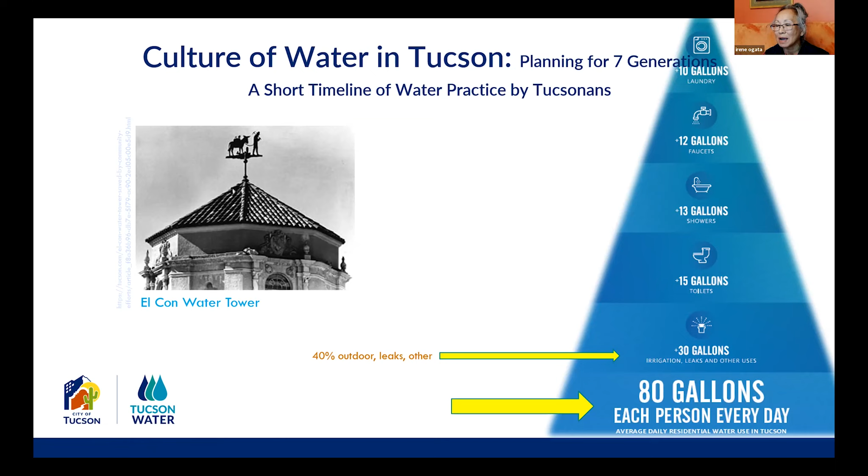In Tucson Water, this is the graphic we're now showing in terms of how we are using water individually. 80 gallons per person per day is the average use, and this shows how that water is being used in the various outlets. But for us here, what we're interested in is that outdoor use—that's where my perspective is from, the landscape architect's viewpoint.

I'm going to start this timeline way back in 1871, when Tucson incorporated, and that was when water was still delivered via barrels by a horse or mule-drawn cart. People were paying 5 cents a bucket as they got their water, and it was still a private enterprise, a private franchise.

In 1882 was the first piped water. The city of Tucson had 25 fire hydrants, and we were paying $216 a month for that usage. The other use the city had for it was to sprinkle Main Street.

Because of the pipes and having to pipe it from wells, there was a demand management problem—we didn't have enough pipes, we didn't have enough pumps. So the city was already concerned with demand management on how to get all that water to the people whose pipes it was getting to. They were already starting to limit irrigation at nighttime, and the water supply to parks was shut off.

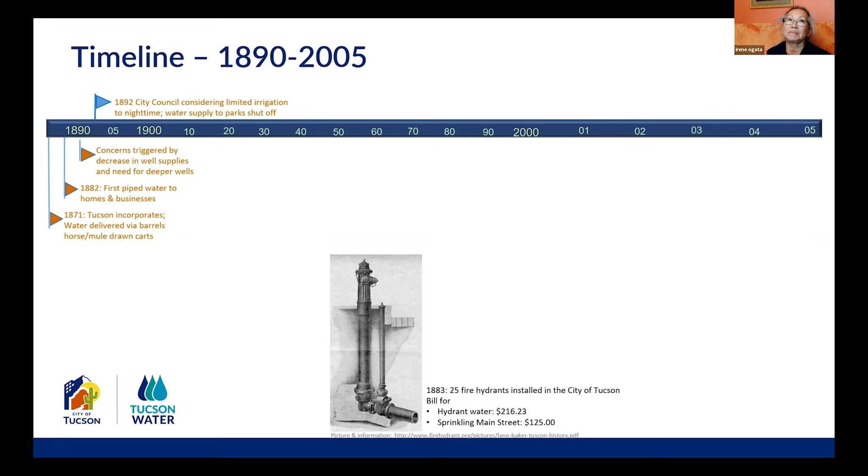In 1900, Tucson bought the water company, so now it becomes a public utility. And I'm putting down 1904, the state of Arizona's proclamation for Arbor Day, because this is really important for the city of Tucson. The ethic back then was to convert a desert city into a garden city.

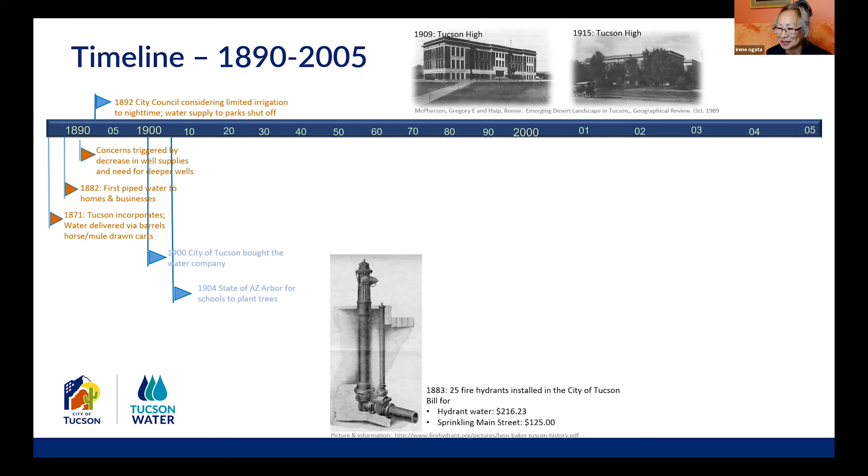The city civic leaders were watering the landscape and watering trees. The Arbor Day proclamation gave students a holiday so they would go out and plant trees. Between 1907 and 1908, the city of Tucson actually planted 10,000 trees, which is amazing to do in a year—because in 2014, the mayor of Tucson had a campaign to plant 10,000 trees in 4 years. So we went a little backwards, but we're still planting trees.

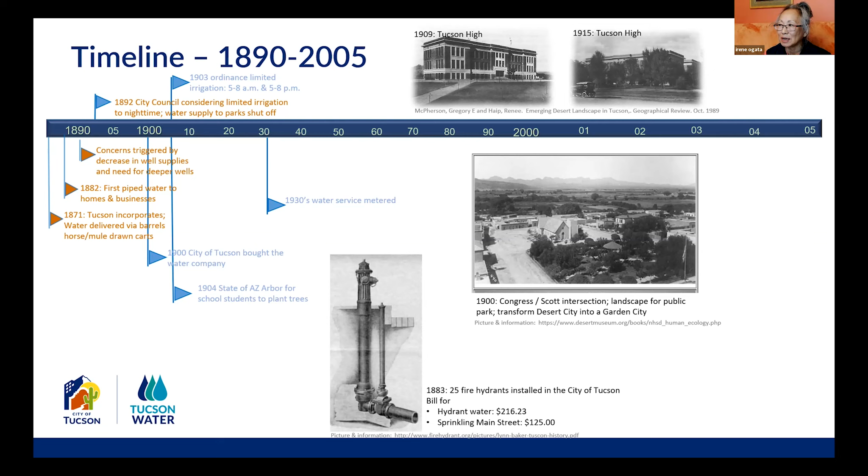In 1930, we now have metered service. Prior to that, the pipes were not metered. Again, the landscape ethic was to make this desert city a garden city, so a lot of this irrigated water was going to the landscape.

Okay, 1940 to the 50s—that's when our population tripled. It's post-World War II, and Davis-Monthan Air Force Base is coming in line. The landscape going into homes has a lot of green, a lot of shrubs, a lot of water use. We're still in that ethic of making this a garden city. The designers are coming from California, and we don't really have any nurseries giving us drought tolerant, low water use, or native plants yet.

At this point, the city of Tucson realizes we're pumping groundwater and the population is increasing so fast, and we're pumping so much water, we're already realizing that this is a non-renewable resource now. So we're thinking about it.

In 1966, the University of Arizona started their landscape architecture program. This was pretty advanced for Tucson or the southern region, because the two landscape architects who started this program were forward thinking, already considering low water use plants. That was Guy Green and Warren Jones.

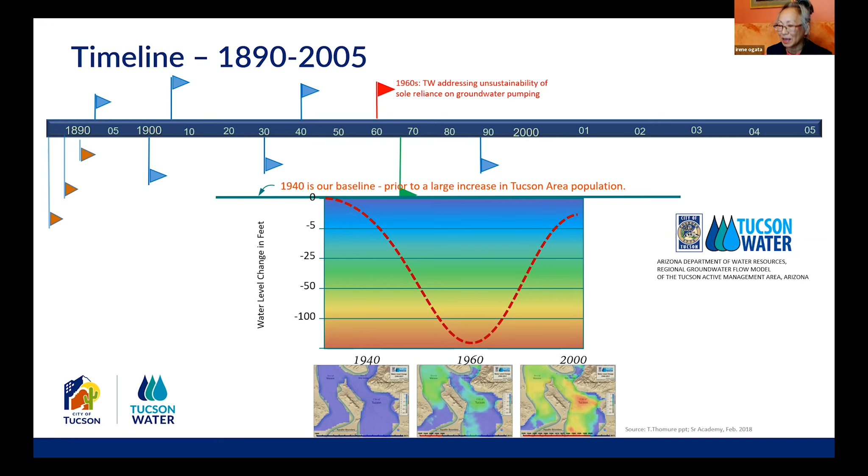Other desert cities having problems were also thinking about it. Denver coined the term xeriscape, and this caught on like wildfire everywhere, in Southern California, in Arizona. We all started using the principles of xeriscape and low water use, showing you can still have a lush landscape with low water use plants.

The Southern Arizona Water Resources Association, SAWARA, formed in 1982 to help inform the public about the Central Arizona Project, and that this was going to be a necessary water resource for us here in Southern Arizona.

Besides informing the public about the CAP project, they started to create a plant list with water use categories, already beginning to promote conservation. This plant list becomes the precursor to ADWR's plant list.

Pima County had a landscape architect in the planning department, and he put together the ordinance and the landscape design manual.

But at this time, with a lot of homes being built and constructed, the designers and people who loved the desert were saying that we were losing the sense of place for the desert. So a lot of these ordinances had to do with trying to help preserve the native landscape and bring it back, or salvaging and saving all of these important plants.

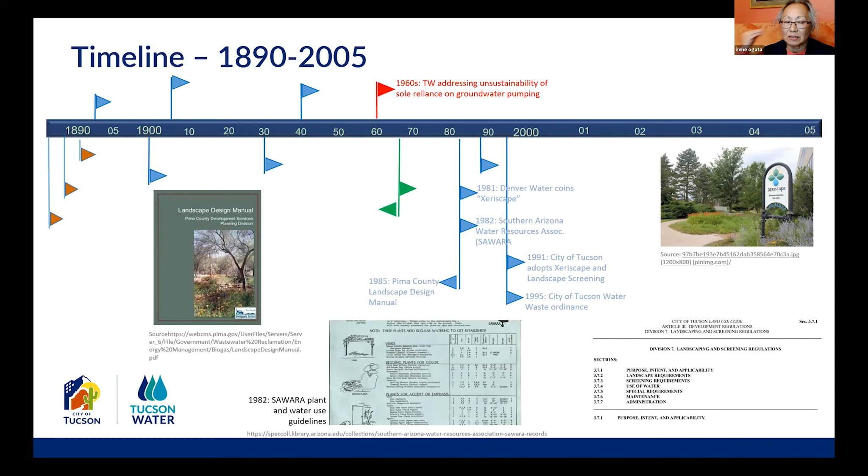The city of Tucson followed, adopting the xeriscape and landscape screening ordinance, and Tucson Water was getting into their conservation mode with the water waste ordinance.

1974 was probably the hottest and driest time in the city of Tucson, or this region. The city council prior to this had been trying to do a tiered watering fee structure in order to incentivize conservation, and they had failed. So in 1976, they appointed a Citizens Water Advisory Committee.

This committee helped push the idea of tiered water rates and also helped construct those rates. The following year, in 1977, tiered rates were passed, and we've been on tiered rates since then.

This was also our introduction to Beat the Peak. Beat the Peak was, and still is, one of the most successful countrywide conservation campaigns.

For 20 years, from 1977 to almost 1997, every year he would come on in the summer to educate people about water conservation, and that's still going on.

The Citizens Water Advisory Committee did its first Desert Landscape Awards, which then switched over to ADWR taking it over as the Xeriscape Awards. Then when they all downsized, all of that went away.

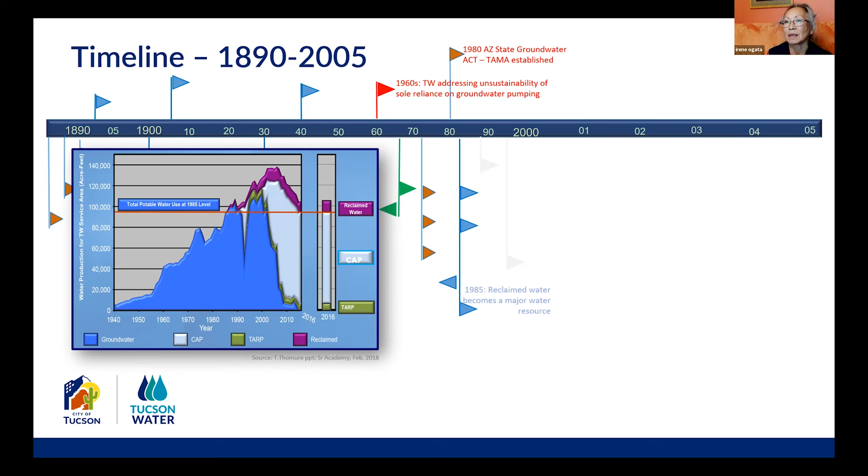So here we are, 1985. The city of Tucson has now added another water source, the reclaimed or recycled water source. So other than groundwater, we are now using this. This water was mandated to be used on all large and new golf courses. We were starting to switch playing fields, city parks, as well as school football fields, extending our purple pipes out that way and using reclaimed water. So there's a second water source we now have.

Okay, so then 1993, CAP is finally completed. The city of Tucson has their recharge and store facilities in Avra Valley. We're starting to store the water. We're only pumping and using the CAP water.

And what we're saying here in Tucson is that we've been doing this for over 4,000 years, because the Hohokams had their acequias and they were pumping water from the rivers to wherever they needed it. So we've been doing that for a long, long time.

All right, so we're coming closer to 2000, and now our growers are catching up with us. The nurseries are forming: Desert Survivors, Nighthawk, Saguaro Nursery is one of the biggest nurseries here now in southern Arizona, and it's also becoming regional. Greg Starr, as well as Spadefoot Nursery. Pima County Native Plant Nursery also came about because they were still finding in Pima County that not enough native plants were being grown by the commercial growers, so they started growing their own plants that they could put in their public parks and public rights of way. That nursery was started.

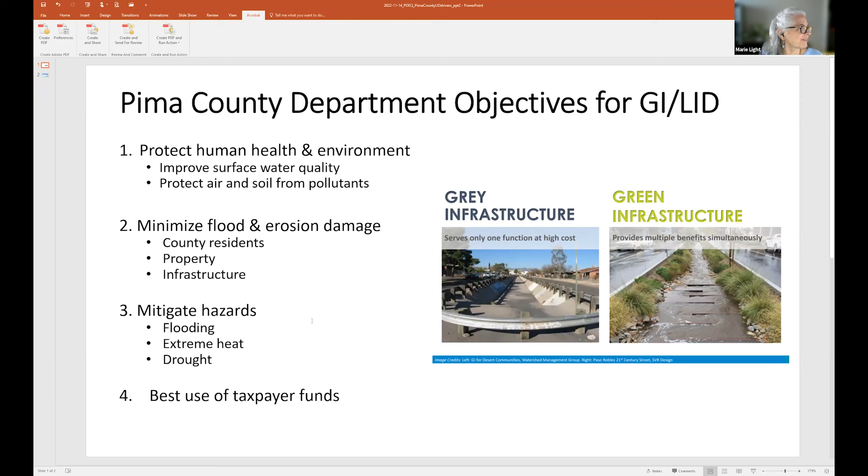I wanted to start with the state, with Arizona becoming a territory in 1863 and then a state in 1912. And of course, you're all aware of the Rivers and Harbors Act in 1899, which was the first federal regulation controlling pollutants and junk being dropped into our navigable waters.

We really didn't have a whole lot of activity until 1948.

When there was the Federal Water Pollution Control Act, I want to blend in with the regulations that were driving this, also what the general perspective was, what this paradigm was for how people were managing stormwater. So in the 1890s, we were looking at just stick it in a pipe and get rid of it.

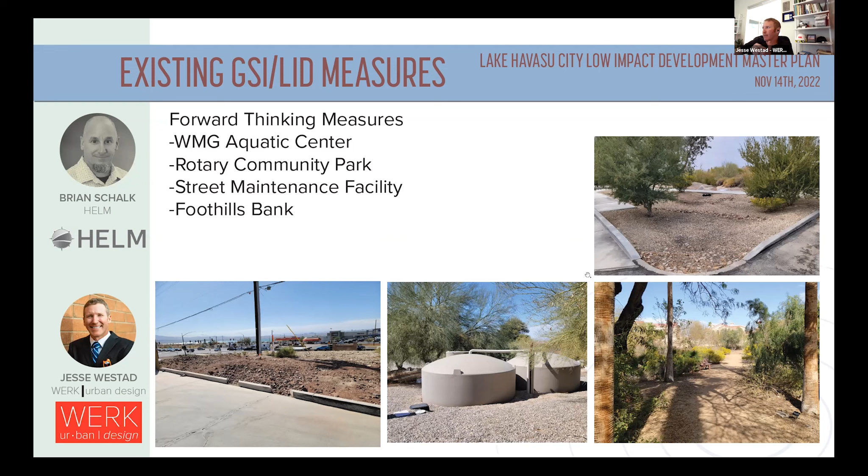And when I went around the city to look at all these projects, it was with Brianna Morgan, who was their water conservation specialist at the time when we started the project, and also Drew Means, who's with their maintenance group. So I wanted them to show me around and see what had been done the last 10 years and how they could build upon this.

Some of the issues with Lake Havasu City is the fact that you only get a little over 4 inches of rainfall. But another big piece is that their streetscapes are often on a pretty hefty slope, so when it rains, it takes all that sediment from everybody's private yards and shoots it into the street, down the road, until it eventually stops.

Drew said one of the biggest issues is they don't get a lot of rainstorms, but when they do, they're out there with maintenance vehicles scooping up all this sediment, getting it back in the trucks, getting it out. And if you have back-to-back storms, you basically start the whole process over again, because right now there's not a lot of infrastructure like street trees to slow the sedimentation down.

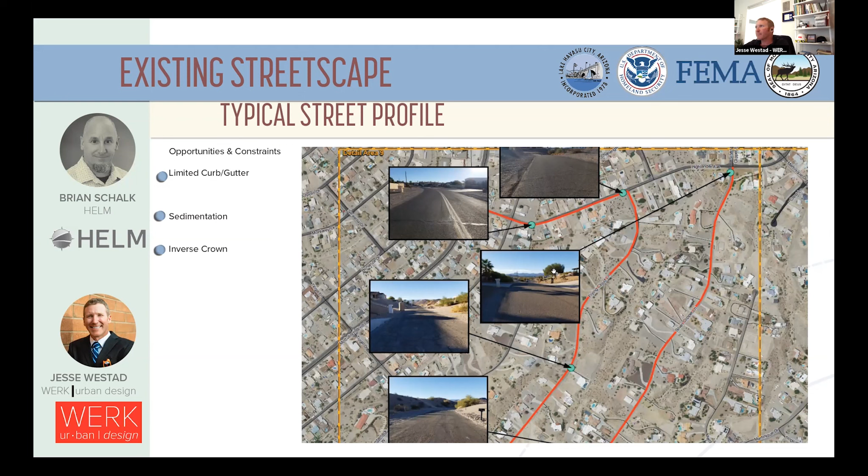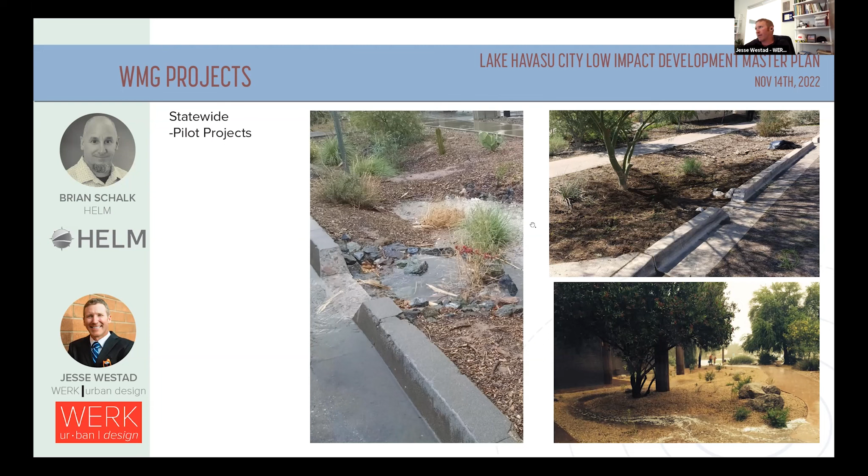So what we wanted to do was take all the lessons learned over the last decade, both from projects we'd helped with Watershed Management Group, and also professional projects when I was at Kimley Horn and then starting WERK Urban Design, with streetscape projects, sediment traps, and how these things all work together.

Another piece is, again, not starting from the beginning, but looking at the details we've already been using and building upon them to make them more specific to Lake Havasu City.

We also wanted to look at how do we do things for, let's say, that single residential house. What can they do on their own yard? Because the majority of the city is single family residential houses, so how can you give them these tools where they can help the infrastructure in the city?

So knowing that, let's say 4.3 inches of annual rainfall, and let's say you only capture on one side of the house with a 1,000 square foot roof, you're running about 2,594 gallons of water you can use. AC condensate, let's say a 2-ton unit, we're picking up 571 gallons. And again, this is for 2 adults.

So laundry machine, average volume per load, average loads per person a week at 2.2, we're picking up 3,931 gallons per year. And then showers, again with 2 people, we're running 8,390 gallons.

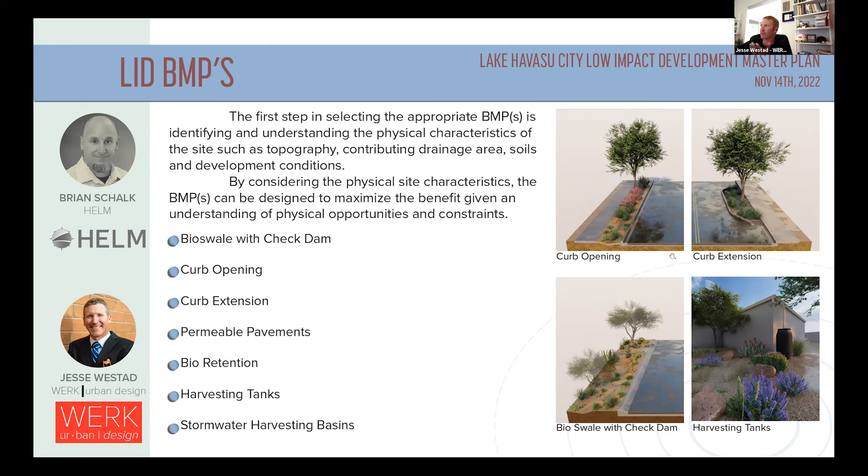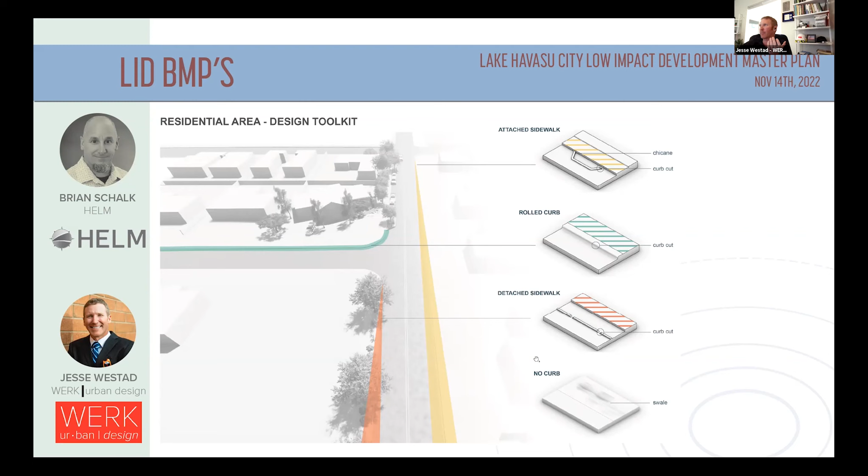And having this where a neighborhood group could be like, okay, well what do we have? Do we have attached sidewalk, a rolled curb, detached sidewalk, or no curb? And then you'd pick which one applies to your neighborhood and create the associated bioswales, curb cuts, bump outs, etc.

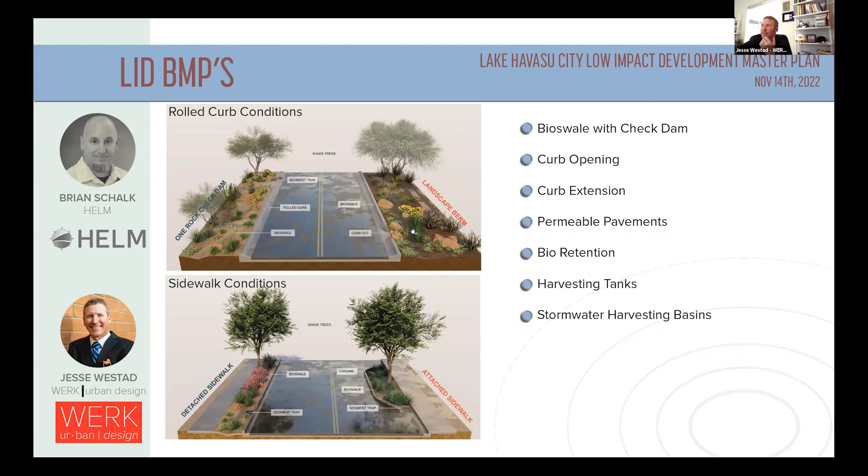Again, because it's so hot there, how could you make it more user-friendly if you're going to be on a bike? So trying to keep detached sidewalks and bring the bike out of the traffic, but then you also need large amounts of shade. So that's what that would look like.

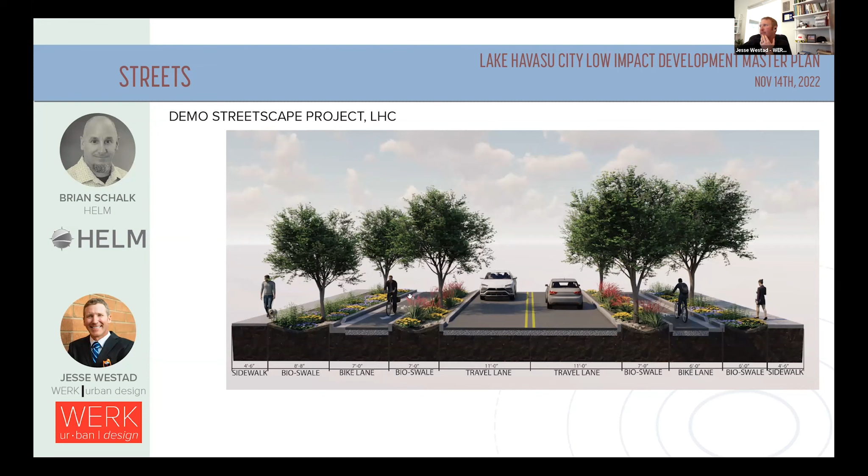What the city was looking for was kind of like these pilot projects. So we picked three sites that the city could use for pilot projects. Their main downtown is this McCulloch Boulevard, this stretch here.

That's where, when they have their events, people go down there and hang out. They also go down there for the little car group, and they're there every week. So the big thing is they don't want to have parking taken away because that's what they look forward to every week. So making sure we are getting engagement with the stakeholders and how we can make these pieces a little bit better for you to enjoy your time there.

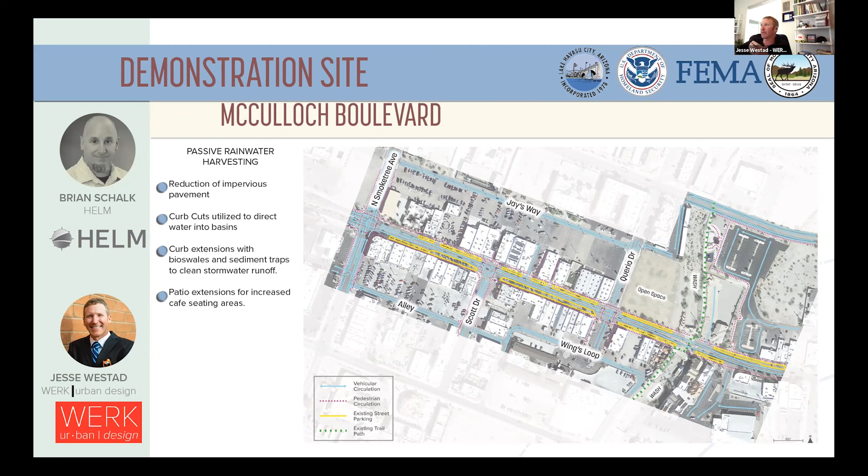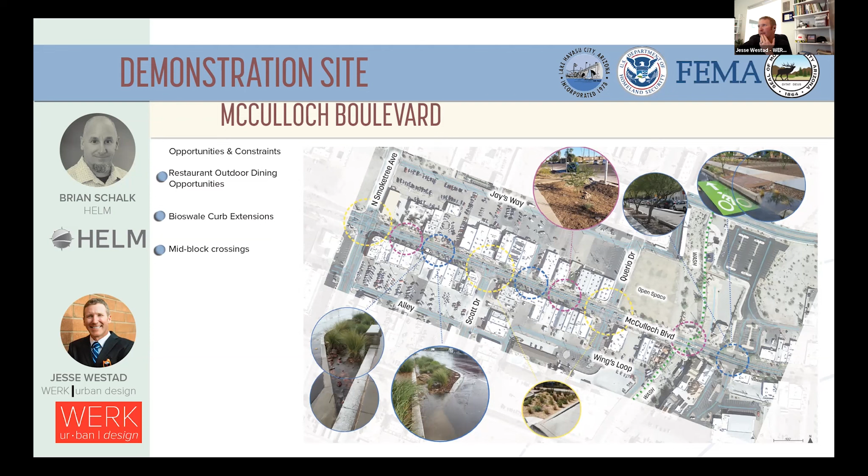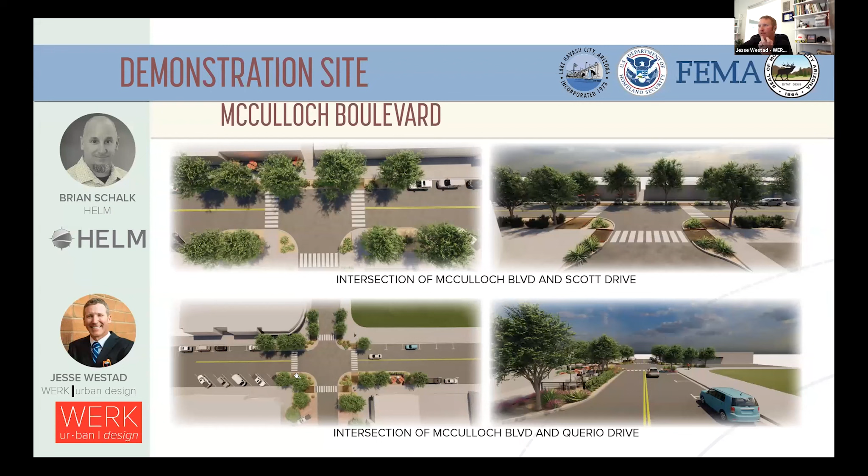Looking at projects we've done in the past, where these same things could be associated with McCulloch, we can show the different user groups how we can provide more shade, provide a cooler environment, reduce the length of walking across streets, and in limited space introduce things such as Silva cells or suspended pavement.

So how can we actually build investment and spend the money on the hole for the tree instead of just the tree that's going to die in 4 to 7 years? We push these systems together where you can have permeable pavement, take the stormwater off the street, put it into the Silva cells, and have the rooting space.

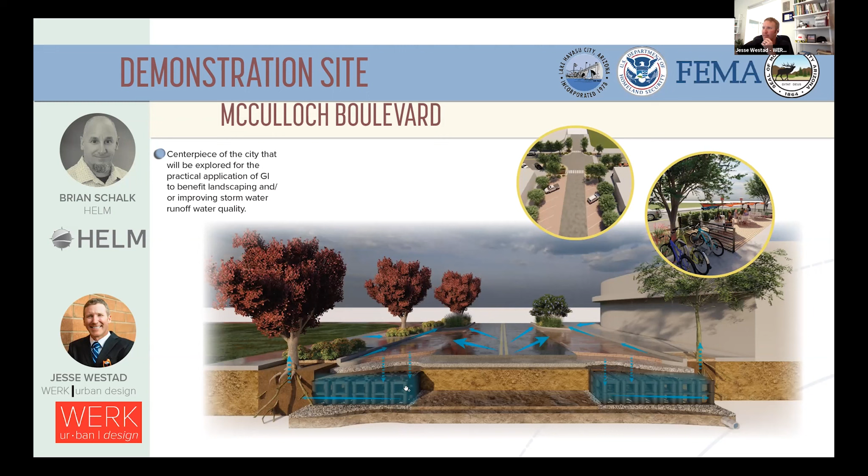Another piece on that McCulloch Boulevard is the Catalyst site, and the city got a grant for this site. What they want to do is provide a mixed use development along the streetscape, and then also a park area where you can have an amphitheater and events, and then have a bridge that connects the parking.

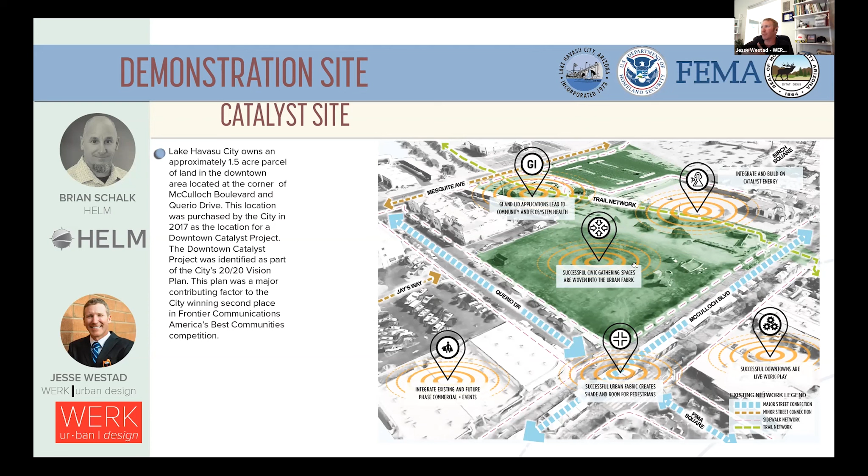This project's going to move forward, so how can we just get ahead with this document and provide examples on how they could do the right thing here?

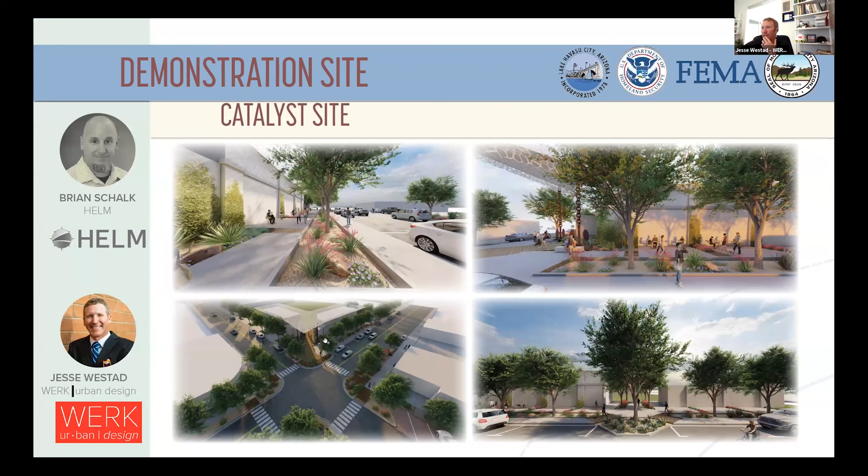Looking at the different pieces, how we can provide street trees and areas for the water to infiltrate. And since it's mixed use, now we're going to have gray water and AC condensate, so now we've got a year-round water source, so we can get more vegetation rolling through there.

This will create this entryway into the amphitheater and truly become what it's supposed to be. When they're saying they want this catalyst site, well, this is going to become a catalyst on how to develop things here within the desert on a limited supply of water.

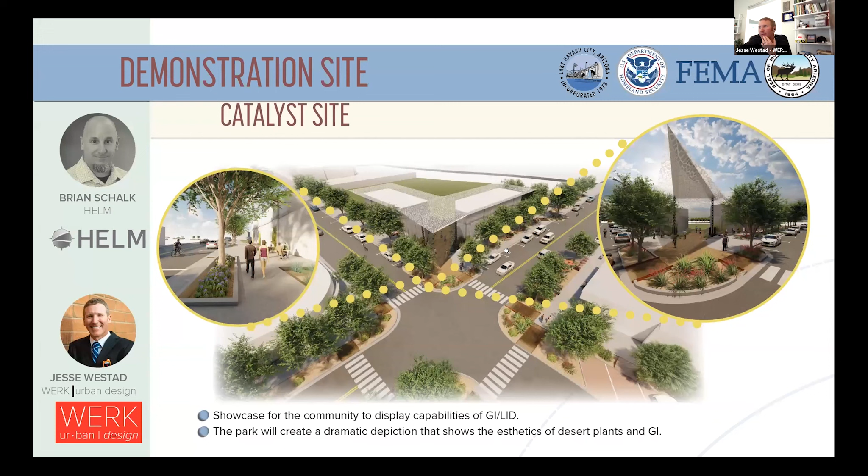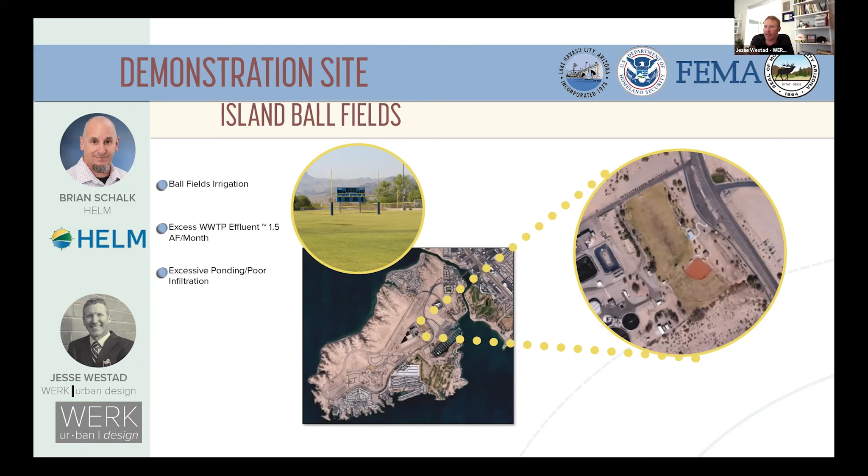The third space we looked at was where they're having issues with water infiltration on their island ball fields. They had a golf course that was taking a bunch of the effluent, and when that golf course went away, now they just have excess ponding. So we looked at what could be done in this situation.

We partnered with Parjana on how that can help move the water through the soil and get it off the surface field. Parjana is almost these long plastic strips, almost like a capillary action that takes the water and helps push it down into the soil. And that's it.